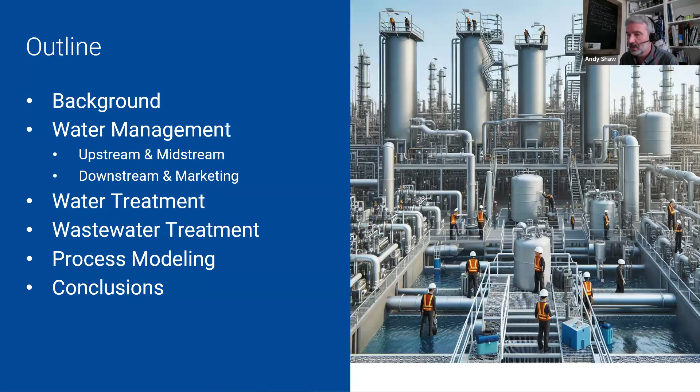Then he'll pass it back to me. I'll talk about process modeling. That's one of my strengths that I've been involved with. And in the book that we'll mention at the end, I was involved in pulling together the team that developed materials for that particular chapter. And then we'll wrap up with just some very brief conclusions, and then the shameless plug at the end for the book for those that want to go and get it. So without further ado, I'll move into some of the background information.

First of all, for those who are not familiar with crude petroleum, some of the things we need to think about are the main constituents that are naturally in petroleum as it's been mined and refined. Of course, there are the hydrocarbons themselves. That's what we're after when we get our crude petroleum, from the paraffins, naphthenes, the aromatics, as well as the aliphatics, and then various other hydrocarbons that are involved in the mix.

In addition, along with the hydrocarbons that we do want, we get a bunch of other things that we don't particularly want, such as some organic sulfur compounds. So as we're pulling that out, we've got to deal with that, and obviously some of that will move into the liquid phase. We also have organic nitrogenous compounds that we need to deal with, some oxygenates. We're also pulling up sediment and water along with the oil, so we've got to deal with that as we're producing the water.

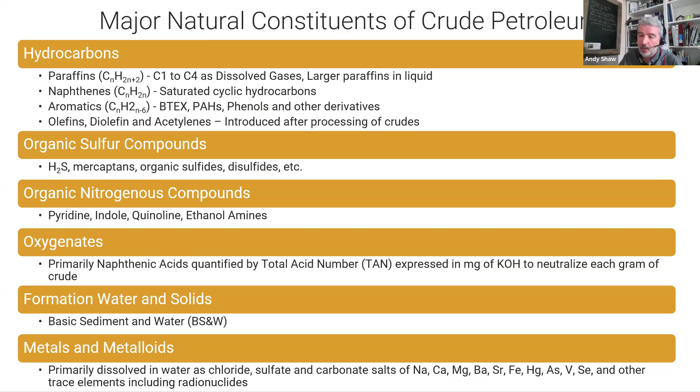We produce water as well, and as the petroleum's coming out of the ground, there's a whole bunch of dissolved ionic species, metals and metalloids that are in the water and in the oil. So we've got to keep those in mind as we're thinking about water management, what's produced as we produce petroleum.

In addition to what comes naturally, we within the industry are adding various chemicals. We're adding chemicals for antifreeze to stop things from freezing up. We will be adding some chlorinated organics there, so we need to be cognizant of those. And then there will be some amines added to suppress H2S production during transport and in the rail car. So there are additional things added to the petroleum that we've got to deal with once we get to the refinery in particular.

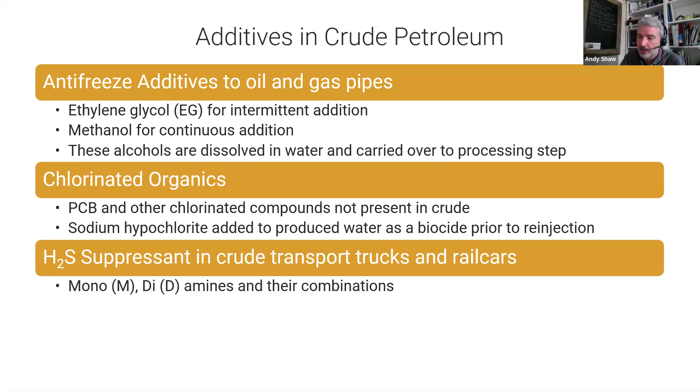Next thing I just want to touch on was how do we think about the petroleum industry? This is good to understand. There are basically three sectors that we've labeled within the petroleum industry. There's the upstream, which is the exploration and production. That's the drilling and production of the oil. Midstream is collecting and moving that down to the downstream, and downstream basically is the refineries. And sometimes we also include in downstream the marketing of collecting the produced products and shipping them out to various folks.

So at each one of these stages in the business sectors, they have different impacts on the water cycle. And that's what we're going to move through in the next few slides. I'm going to pass it on to Sam to start with the upstream and then move on through the process and look at the water impacts.

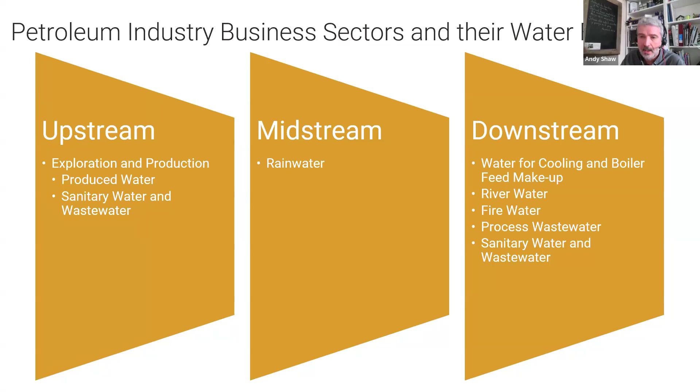So with that, Sam, if you want to unmute yourself, I'll pass it on to you. And you just nod when you want me to go to the next slide. I think you're muted right now, so we've got to unmute you. Okay, can you hear me now? I can hear you now. Okay, great. Over to you. Thank you, sir. So thanks, Andy. Let's move on to the next slide.

Okay, so this is a representation of the sectors that Andy just talked about. It starts with the upstream, exploration and production. Midstream is storage and transportation, and downstream is processing, refining pretty much. And then finally, marketing through terminals by rail cars or barges, etc. Next slide, Andy.

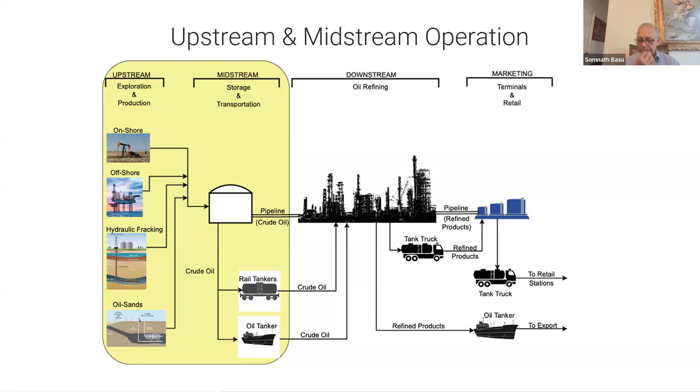So we are going to start with the upstream part of it. And what are the resources? This slide shows a very elementary description about the resources. You can see the conventional resources are up on the top surface, very close to the ground. And then the unconventional resources are the shale oil and gas resources, which are farther deep down, and they are all stored in very, very fine porous rock structure. So this gives you a background of what kinds of petroleum resources are there, conventional versus unconventional. Next slide, please.

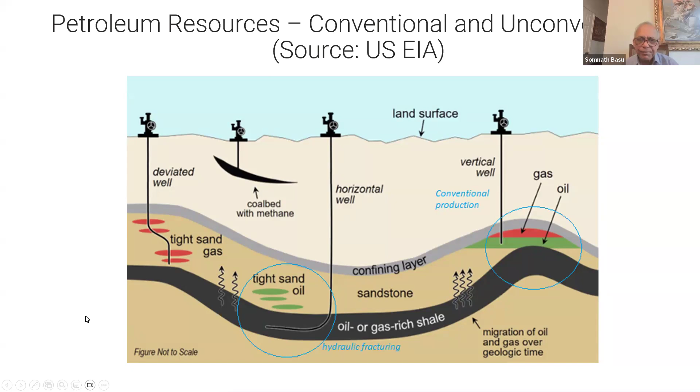Okay, I'll go through this very quickly. Essentially, for conventional production, the petroleum crude comes out from the ground through the wells, and then it goes to separators, and this is a three-phase separator where you can separate oil, gas, and water. And water, you can see from the bottom, goes to the processing stage, and then finally it is disposed. And currently the major disposal means is injection into the ground.

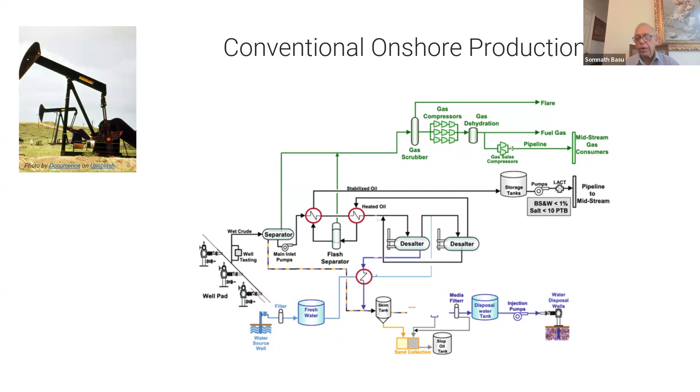Other than that, you can see the oil that is processed goes to the desalter, and I'll describe the function of the desalters. Also, please note that desalters are not very common in the upstream industry. There are some sites which use desalters, but primarily it goes straight into tankage and from there is transported to the sales and marketing segment. And then the gas goes to gas processing, gas dehydration, and then to the pipeline. Next slide, please.

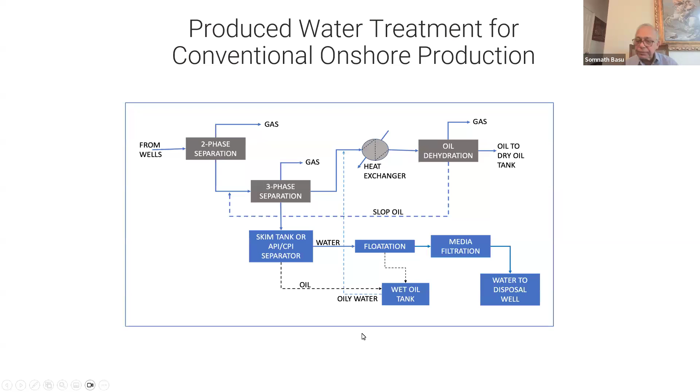Okay, the conventional offshore production is very similar to conventional onshore production, except for the fact that the footprint is very limited here. There is very limited space because these are all located on the platforms, and these are platforms in the deep sea or ocean, so they are footprint challenged. That's why you can see in many cases they use cyclones or hydrocyclones as opposed to API separators, which use a lot of space because it's basically gravity separation.

And then the compact flotation unit: instead of DAF or DGF, typically IAF is used, and I'll explain what the difference is. But induced air flotation units are used, which consume less space. And again, the water is sent out for disposal, and in this case the disposal is overboard, so they are disposed into the ocean or into the wells underneath the ocean. In most cases, it is disposed into the ocean. So there are many regulations that regulate the quality of the effluent. I'll come to that later on.

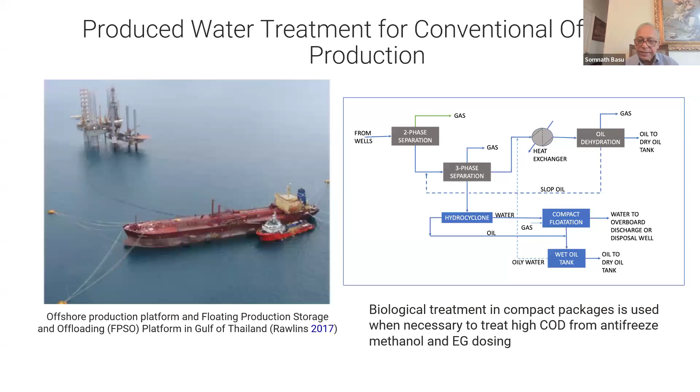And then let's go to the slide, Andy.

Okay, now the second part of upstream production is unconventional production. That's by hydraulic fracturing, and you must have heard quite a bit about hydraulic fracturing. And just to give you a perspective, in the US, about 85% of the production is by unconventional production. And a major part of that, I would say maybe 90% of that, is by hydraulic fracturing. And there are three major shales or formations in the US that contribute to this abundance of oil and gas in the US.

I can remember back in the 1990s or early 2000s when the US was building some ship channels for receiving crudes from the Middle East and other countries. Now, with the advent of the upstream production methods, particularly hydrofracturing, where the water is sent at a very high pressure and very high velocity, it can break up the rock structure, the shale structure. In this case, the oil and gas is trapped in the very, very fine micropores of this rock structure, so it's very difficult to tap out oil from there. This was invented by a gentleman by the name of George Mitchell of Dallas, Texas. And hydrofracturing releases the oil and gas, and you can see the simplified version.

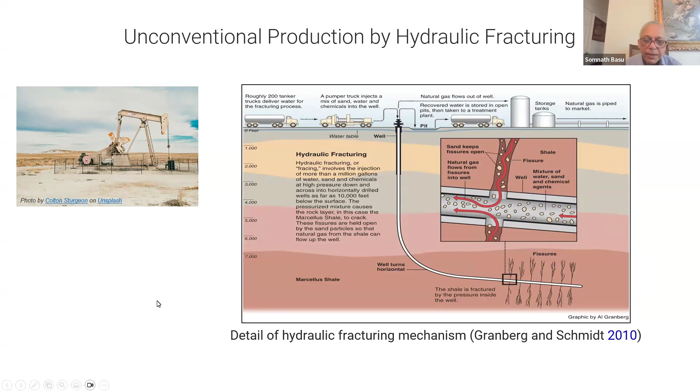Next slide, please. Andy, can you please move the slide? Can you please move the slide, Andy? Is it moving? I moved it on my end. It might be laggy on your end. Okay, I do not see it. Are you seeing the shale gas situation, Dan, or are you still? Yes, shale gas plays, lower 48 states. I think you're laggy on your end. Okay, then I'll go to my slides.

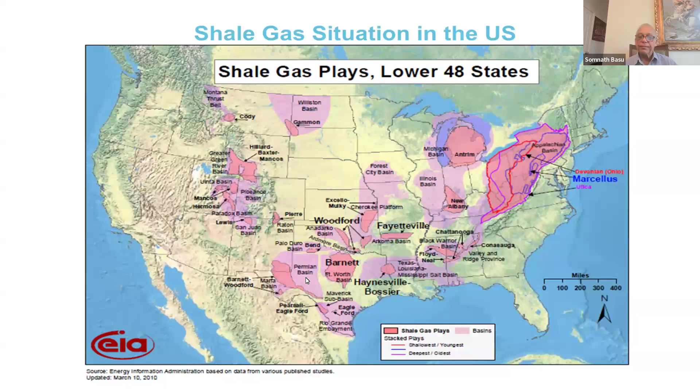So we're just showing the different shale gas areas which you've already got. Again, this goes back some 10, 12 years. I'm sure this has been updated by EIA, but this is what I had. And so you can see the Marcellus Shale in the northeast corridor, and then Bakken is up in the North Dakota, Wyoming area, and then there is the Permian Basin in Texas, West Texas, and New Mexico. Okay, yeah, I can see it. Okay, then the next one.

Okay, so when I said that water is pushed at a very high velocity, it's not just water. You can see this is the composition of frac water. Frac is the short term for hydrofracturing, and people in the industry very fondly call it frac. So you can see at the bottom of this table, water is 99.5%, and there are various other constituents, but each has its own function. And you can see the role of each of them. And one of the most important things is guar gum.

And basically guar gum is used, which is a gel, and this is used to suspend the proppants. Proppants are sandy particles, very fine sand or silica particles, which are suspended into the water, and that goes and hits these rocks to break them apart. So you can see each of them has a purpose. So I'm not going to go into the details, and we can discuss this at the end.

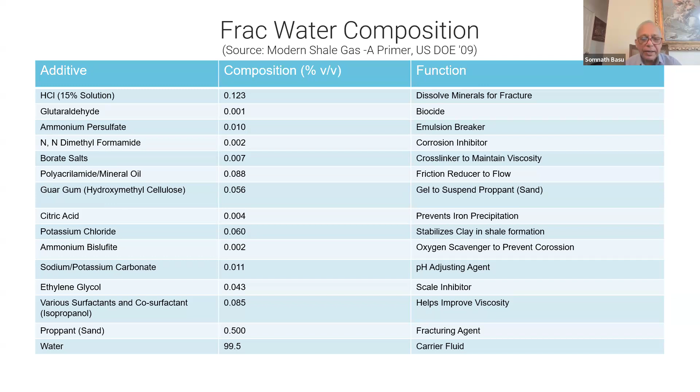And you can see what is the water footprint in upstream operation. Frac water, then flowback water, where flowback is some of the frac water and some of the produced water. What's the difference? Now, flowback is when most of the frac water returns along with some produced water. Produced water is the kind of water that is also called connate water, C-O-N-N-A-T-E, connate water. And that is the kind of water that is native to the rock structure. So it comes out with the crude. So it is not something that is injected from above ground.

And you can see I have the list of the constituents or characteristics of produced water, and the TDS is extremely high. Okay, you can see high concentration of sodium, high concentration of chlorides. So it is very, very saline. But along with that, there are some very important constituents that one has to consider while coming up with some technology for treating the upstream produced water. And those are the divalent cations. Particularly, it is very critical at Marcellus.

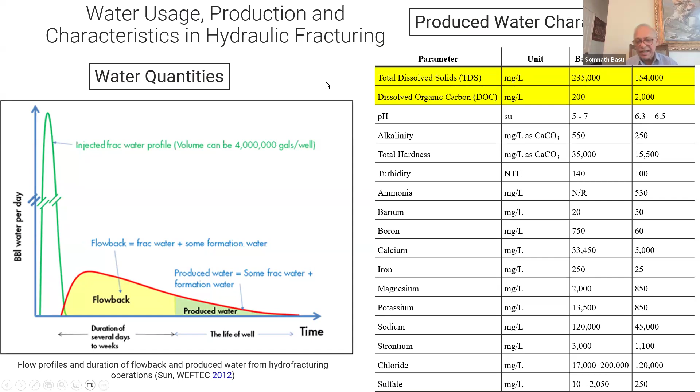If there is a lot of calcium and magnesium hardness present, then you have to treat it by lime soda process, followed by a treatment by sodium sulfate, and sodium sulfate reacts with divalent cations barium and strontium to precipitate them to form solids of barium sulfate and calcium and strontium sulfate, so they can all settle in the gravity clarification step, after which the water is ready to go to biotreatment. But I can also tell you biotreatment is very uncommon in upstream produced water.

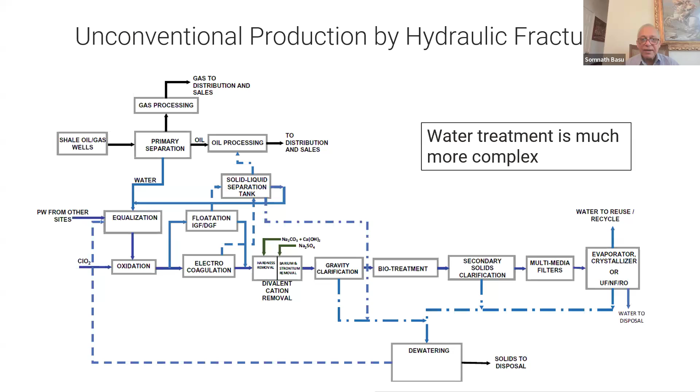In many cases, it's not needed, but I'll explain to you later that regulators are asking the operators to move away from the underground disposal. What is the option? The only option is you recycle and reuse it. And for that, the steps to be taken are evaporation, crystallization, or UF and RO. And we'll explain that later on. Next slide, please, Andy. Okay.

So to summarize, two main classes of upstream production, unconventional and conventional. Now, I described in detail the conventional, onshore and offshore, and unconventional hydrofracturing or fracking. Now, what I did not describe is thermal EOR, thermal enhanced oil recovery. And this is mainly applicable to the oil, the rocks that are mined in the Canadian Rockies, and they are semi-solid, very hard, and they don't move, very high viscosity.

So you have to do thermal treatment by steam, or in certain cases in situ combustion in the formation sites to make them liquid enough so they can be transported by piping or by other means of transportation. Now, here also the water treatment is challenging because you have to have a boiler unit on site to produce steam. And in order to have the water of the right quality for feeding into a boiler, you have to have the water treatment system that can produce the boiler quality feed water, which produces steam that is used in thermal EOR. Next slide, please, Andy.

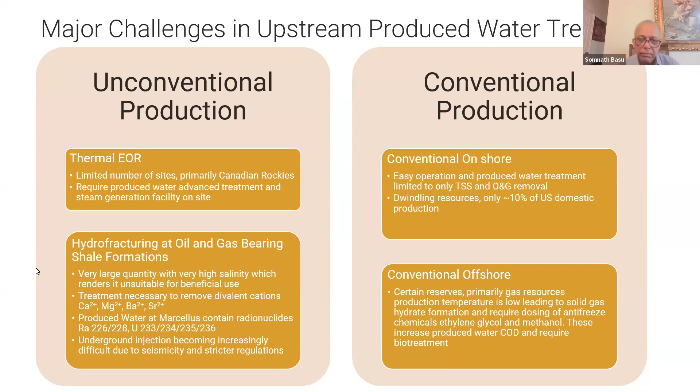Okay, the next one is downstream and marketing. I skipped the midstream because that has to do with transportation, and there is not much water or wastewater treatment there. So next slide, please.

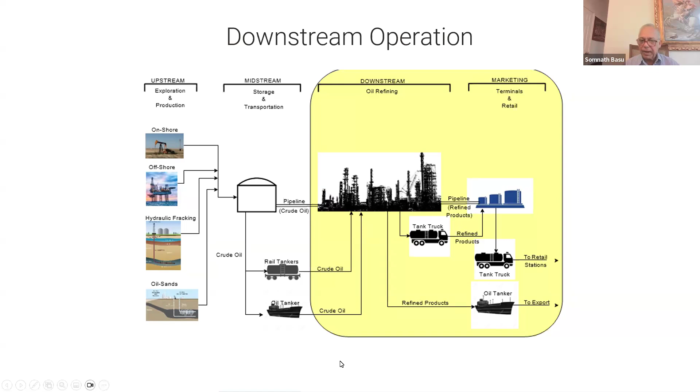Okay, so downstream operation mainly is petroleum refineries, where the crude is processed to produce valuable products, which we use day to day: gasoline, naphtha, diesel, and of course gas, which is the lightest fraction. And you can see the slide again, the downstream part of it, and then the products are sent out to the market by barges, oil tankers, pipelines, and tank trucks. Next slide, please.

Okay, now in case of downstream, we have both water treatment and wastewater treatment, and on the right hand corner is the block flow diagram for water treatment. I'm not going to go through it. It seems a little bit complex, but let me explain what the main water streams are. Stormwater handling and disposal. Stormwater in most cases is clean water. It doesn't have to be treated.

So it is either entirely oil-free, but the stormwater that falls into the process units like distillation columns or the places which have sheens of oil, they are called accidentally oil contaminated water. When it is entirely oil free, let's say from the office buildings and from the areas which are totally away from the actual refining unit operations and processes, mostly they are stored for later use as utility water or fire water or even makeup for boiler and cooling tower.

But if it is accidentally contaminated, it is sent to reservoirs and then it is tested for COD and other contaminants. And if it is hydrocarbon free, then it is combined with EOF water and then it is sent to the proper disposal and use. Then fire water storage and handling. This is very important, and most of the refineries have their own impoundments to store the stormwater, rainwater, and water from other sources like lakes or nearby rivers. Because in case of a fire or accident, fire water is very important to prevent and to mitigate the situation.

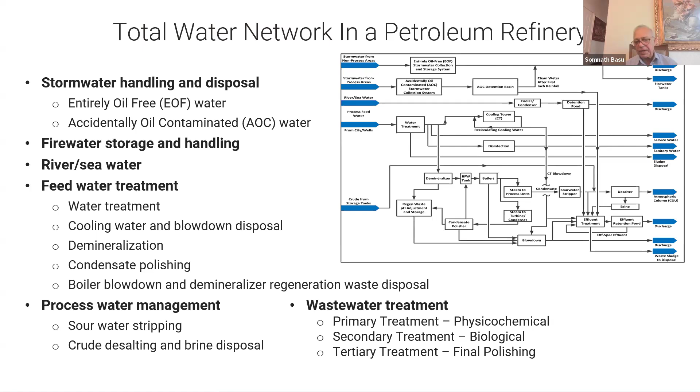And then finally, wastewater. This is the total water footprint: primary treatment, secondary treatment, and tertiary treatment, leading to final polishing. Next slide, please, Andy.

Okay, so you can see the water used in refineries, and I just mentioned the blowdown, which is to the wastewater treatment plant. So it is lost, and that is a huge consumption of water. And then the next is the boiler feed water. And then there are other consumers also in sanitary water.

And why do we need sanitary water? Because where will the employees go? They need sanitary water for drinking, cafeteria. Typically the sanitary water discharge is not sent to the process wastewater. It is typically handled by a packaged plant on site. And that's true also in case of offshore in upstream, where the personnel waste and the cafeteria waste are treated in separate package plants on the platform. Next slide, please.

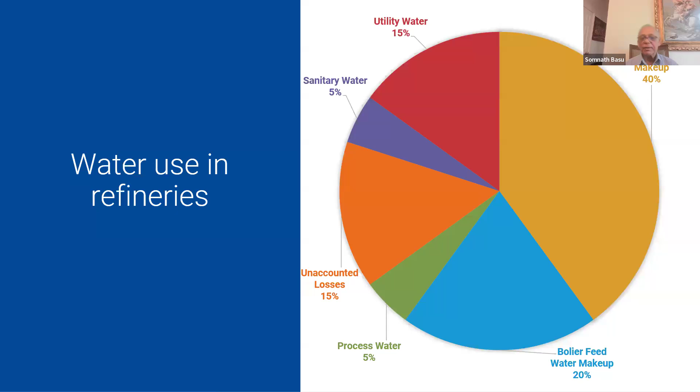Okay, now this is a very familiar slide. Now, when the water is pretty clean, it comes from a lake or surface water. It just goes through the traditional process train: coagulation, flocculation, and then settling sedimentation, and then it goes through a multimedia filter, and it feeds the advanced treatment steps.

What is advanced treatment? Now let's say the source of water is groundwater, which contains a lot of reduced iron and manganese in the water. Then, as you know, when iron and manganese from groundwater come in contact with atmosphere, they get oxidized, and they form particulate matter which settles in the downstream units, and you cannot use that. So that's why first they have to have some aeration step to remove those dissolved iron and manganese as particulate matter, and then you have to remove the hardness also.

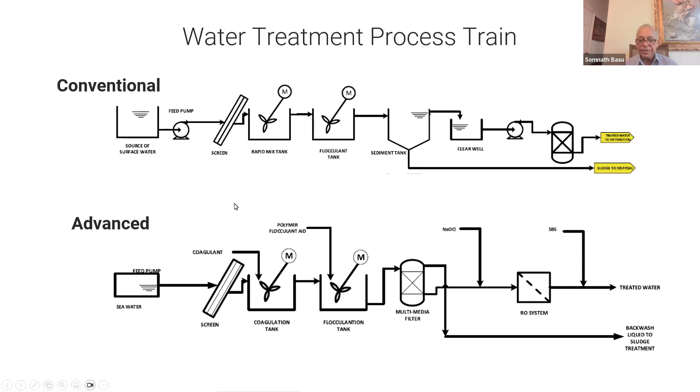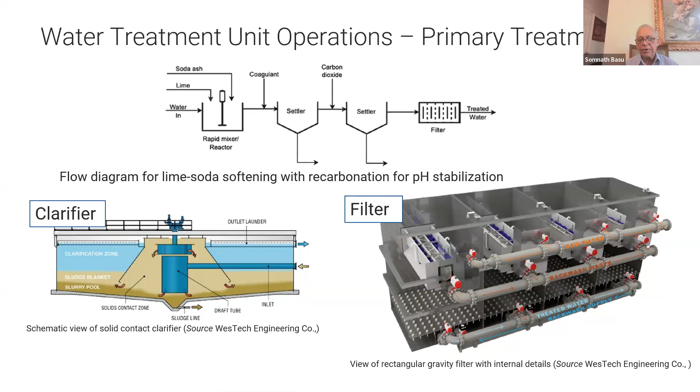Then the next slide, please. These are the pictures of some of the units that are used, and these are the same as domestic water treatment. So top there is the hardness removal. It's a traditional lime soda process, and then recarbonation by adding carbon dioxide. So that's the only thing I would add there.

Next slide, please, Andy. I guess it's not. Is it lagging a little bit? We've got water demineralization as the next topic. So, okay.

Water demineralization. And here the demineralization is done by ion exchange or RO, as I said. And ion exchange is very dominant and very traditional in case of refineries and thermal power plants. And it consists of a treatment train for cation removal and then decarbonation to remove CO2, then anion removal for chloride, sulfate, etc. And then final polishing mainly for silica removal and any residual anion and cation that are carried over from these two sets of exchangers, cation removal or anion removal.

And the regeneration is done periodically by sulfuric acid for cation removal and caustic for anion removal stages. And they are all released to the wastewater treatment plant after pH neutralization. And then RO process, one or the other or a combination of both are used. So RO is preceded by UF to remove suspended solids and then RO to remove the TDS, the dissolved solids and salts. Next slide, please.

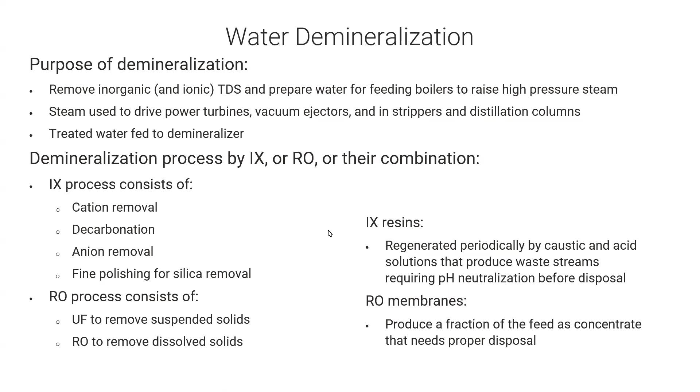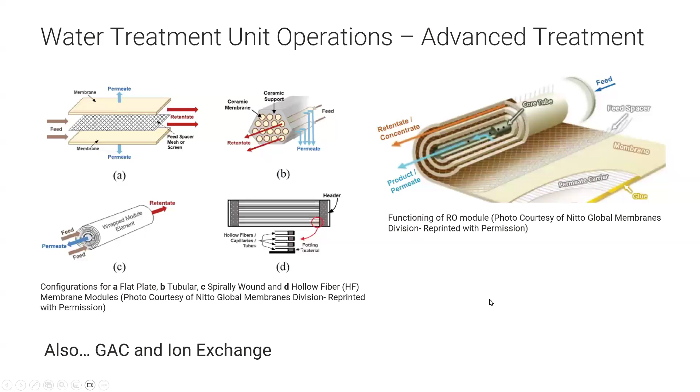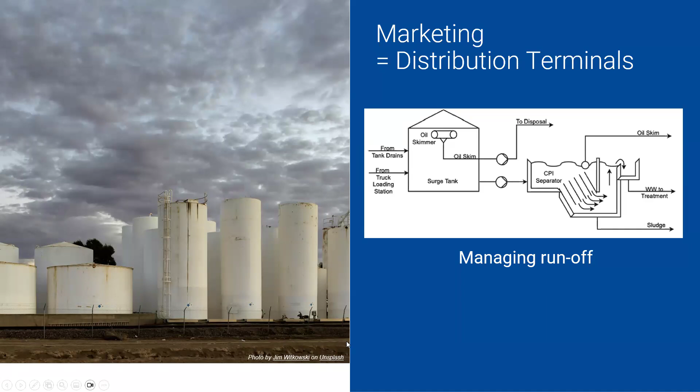Next slide, please, Andy. Marketing. Okay. So, Andy, I don't see the wastewater slides here. Okay, next one. Yeah, I see the wastewater slides. Okay. Okay.

So this is the crux of the secondary treatment. So basically, refinery wastewater has two levels of treatment: primary treatment and secondary treatment. I must say this: primary treatment is very, very important in case of refinery wastewater because there is a lot of contamination by oil, by hydrocarbons. And if there is passage of hydrocarbons into the biological treatment, then the whole treatment process fails. And there are many such examples.

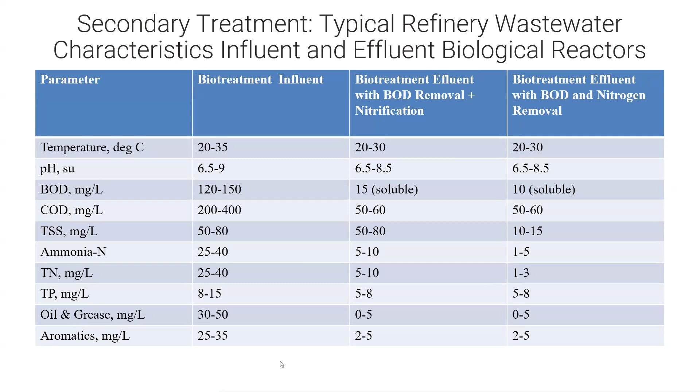Okay, here it is. Okay,

So in the downstream, there are two places, two unit processes or unit operations that use process water and that produce waste that go to the refinery wastewater treatment plants. Now, one is sour water treatment. What is sour water? Sour water is something that contains large concentrations of H2S and ammonia. Where does it come from?

In refinery operations, in various distillation columns and reactors, there is the sulfur compounds, the organic sulfur compounds and H2S come out with the products. Now, these products, let's say you use gasoline or diesel or even fuel oil that has high concentrations of sulfur compounds. When you burn it in a power plant or in an internal combustion engine, all those emit as SOx. And because of the tight regulations controlling SOx air emissions, the refiners are having to remove sulfur in the crude that comes with the processing steps.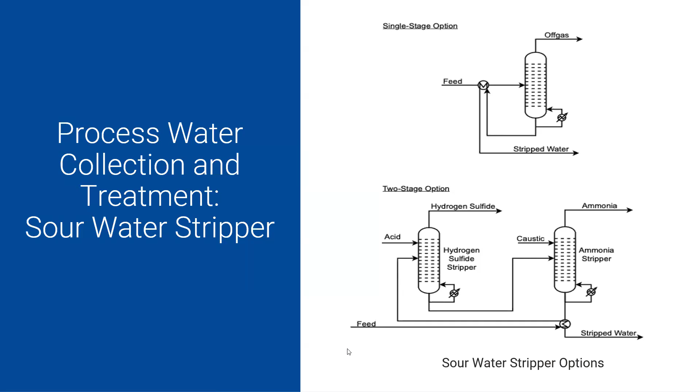Okay, the other unit where process water is used is a desalter. In the desalter, the crude as it comes from the ground, before it goes to any processing unit in a refinery, first goes through the desalter. Because as I stated before, crude contains a lot of salts, and you cannot allow that salt to go through the refining and downstream processing. You have to remove the salt, and that salt removal is done by desalters. And here, water is injected at a high pressure to mix up with the crude, and the separation has two functions. One is desalting, and the other is separating oil from water, because the aqueous phase, the water that you inject, dissolves all the salts.

So it separates the crude into an oil layer at the top and water layer at the bottom. The water layer goes to the sour water stripper where it is used to remove H2S, or directly to the wastewater treatment plant, and the oil layer is fed to the crude refining units, the atmospheric distillation column. So that's the fate of the two layers. And so you can see it's very important to have this desalting. And why is it important?

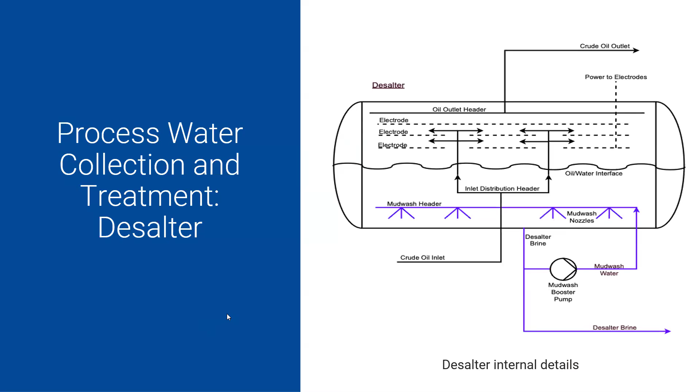Okay, so this is the schematic of the desalter units. It can be single stage or two stage. With single stage desalting, you can remove up to 95% of salt, and with double stage, you can remove up to 99% of the salts. Next slide, please.

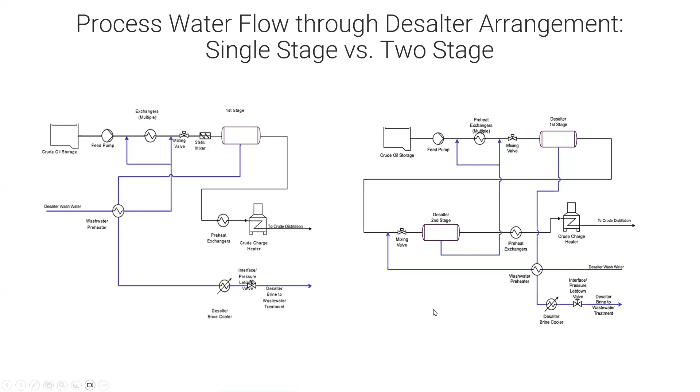Okay, so what's wastewater treatment? The wastewater treatment has two main steps: primary treatment and biological or secondary treatment. Now, again, as I mentioned, the function of primary treatment is to remove oil from water. And it is done in two steps: primary oil water separator, which is API separator. Mainly it works on the principle of gravity separation, like a clarifier. The only difference with a clarifier is it handles a lot more oil.

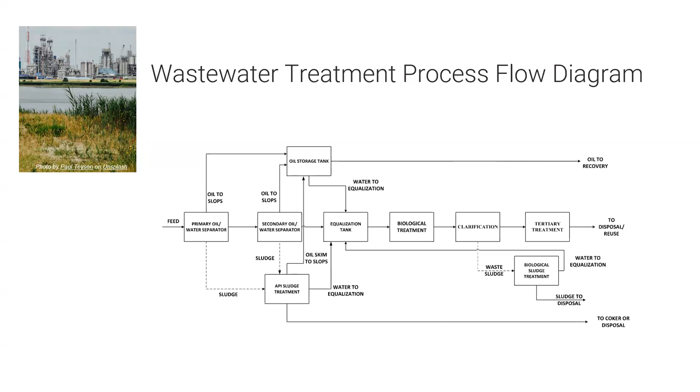And typically you can see oil is present in wastewater in three phases, which is the free phase oil. A large part of the free phase oil is removed in the primary separator, API separator. Then dispersed phase, which is the emulsion, which you cannot remove by gravity settling. And there you have to use the DAF or IAF, induced air flotation. And then after equalization, it goes to biological treatment, and then it goes to tertiary treatment and disposal.

Next slide, please. Okay, this is a picture of the API separator. It is very similar, as I mentioned, to a clarifier, handles a lot more oil. And so these are the parts, and you can see it removes bulk of free phase oil droplets more than 150 micron in size. And the influent oil and grease concentration can be anywhere between 200 and 80,000 ppm. But the effluent has to be limited to below 200 because it is fed to the secondary oil separator. Next slide, please.

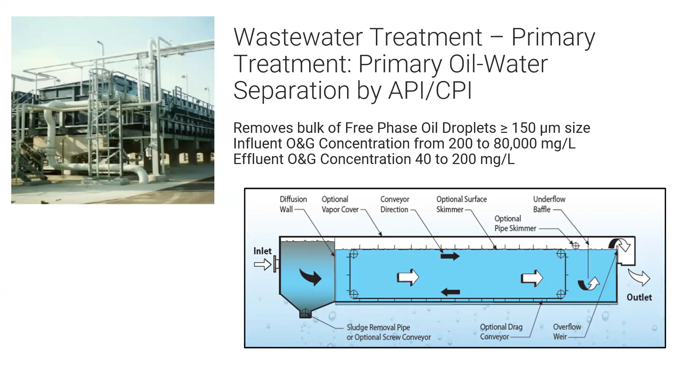The secondary oil separator of the primary treatment is by DAF or IAF. Now, what is the difference? The bottom left corner shows a graph of the bubble size and the distribution of the number of bubbles. And why is it important? Because DAF, or DGF, has to have between 10 and 100 micron size of bubbles to be effective. And in case of DAF, it is dissolved air.

So air is saturated with the DAF effluent, the treated effluent from DAF, and then it is released as it enters into the DAF unit. So it is released in fine bubbles, and those bubbles attach on their surface the fine emulsified mist of oil droplets. And the effluent has to be around 25 milligrams per liter. As you can see, IAF or IGF has higher bubble size.

And what is the difference? The difference is that in case of DAF, it is dissolved. In case of IAF, it is mechanical. Air is mechanically dispersed by some eductor or by mechanical mixers. That's why the bubble sizes are different, and so is the separation efficiency. But still, IAF and IGF are used particularly when the footprint is challenging.

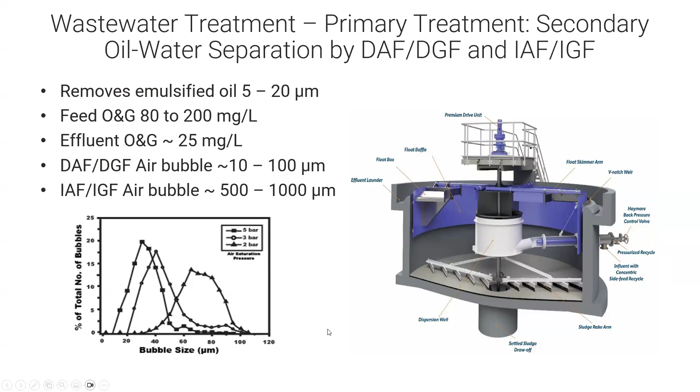Okay, biological treatment is the last unit process. Now, as you can see, lagoons, trickling filters, these are fixed film processes, and mostly lagoons are present in very old refineries, but they require large real estate, and many of the refineries, because of their space crunch, are coming out of lagoons and getting into more advanced type of treatment, typically activated sludge process. But lagoons and trickling filters and RBCs also are used by old refineries.

Trickling filters, one of the examples is the Deer Park refinery in Houston area, where they use trickling filter. It shaves off 30% of the COD upfront of the activated sludge process, and also it reduces the temperature because the wastewater temperature is upwards of 40 degrees C. It has to be brought down for effective activated sludge process. So it is brought down to below 35 degrees so it can be biologically treated. And then, of course, our old friend, conventional activated sludge, and that's the workhorse for refinery as well as domestic wastewater treatment. Next slide, please.

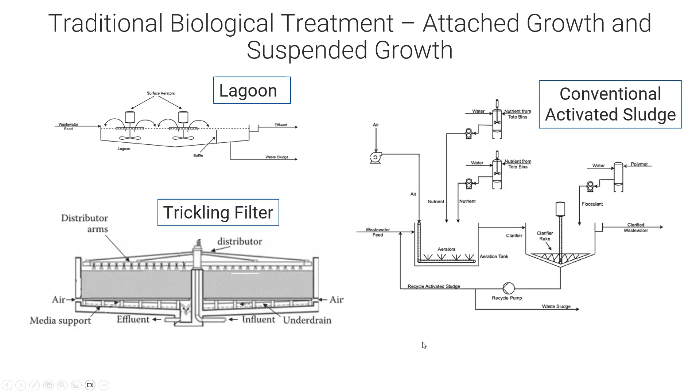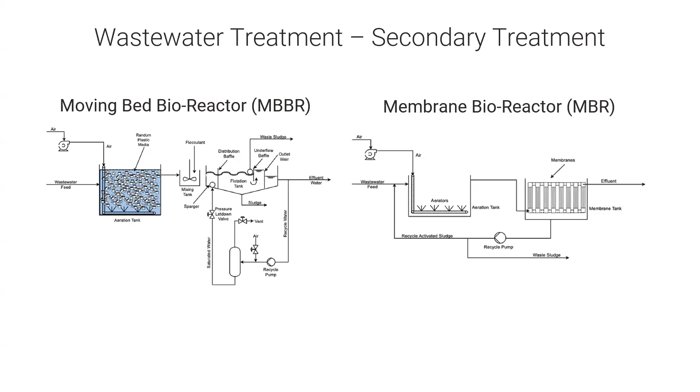Then many of the refineries, particularly grassroots refineries, are going more and more into newer processes like MBBR and MBR. I'll not go through the details, but with MBR, the main driver is to be able to reuse, because after MBR they use RO, and then they reuse it for recycle and reuse it for boiler feed and cooling tower.

Next slide, please. Okay, tertiary treatment. Now, why tertiary treatment? What are the drivers? The two main drivers are, as you know, refinery wastewater contains a lot of chemicals. So they may be driven by the regulatory requirements, or the other driver is reuse, as water supply is becoming more and more limited. And we have shown three typical processes.

Filtration is common with every refinery because once in a while the activated sludge process goes through filament problems, particularly nocardia problems. If there is a lot of slippage of oil from the primary treatment, it ends up in the activated sludge process. It creates nocardia, and refineries operate at very, very high SRT, 30 to 40 days of SRT. So it creates flocs that don't want to settle. So most of the refineries have filtration systems to arrest any passage of solids so that they can comply with the regulations.

GAC, the main purpose is to remove organics that may be toxic and that may not be in compliance with the regulatory requirements. And then, of course, advanced treatments to remove any metals that may get carried over, because metals are not arrested by any of the treatment processes upstream.

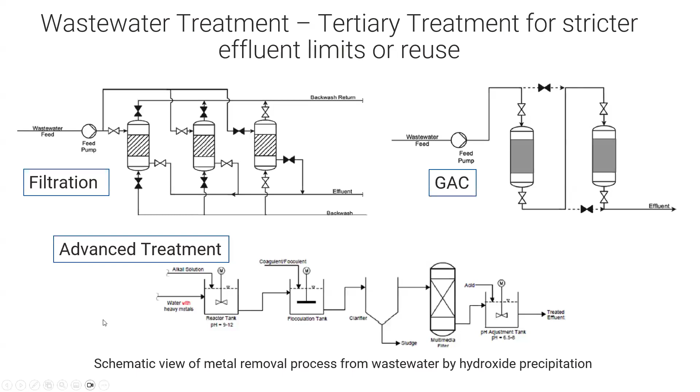Next slide, please. Okay, Andy, please take over. Okay, thanks, Sam. So you can see there's a lot of detail and a lot of different processes within petroleum processing. So we have a lot of different types of water streams, different levels of contaminants. So I just wanted to spend a little bit of time touching on some of the tools that are available to understand some of the different transformations and treatment options.

Process modeling: one of the very useful applications for process modeling is understanding the scaling potential that we have. As Sam was talking through, particularly the unconventional treatment, looking at fracking water, it has a high propensity for causing scaling. And if you try to do a hand calculation or a spreadsheet-based calculation to understand what level of scaling you are going to get, you don't get very good results. It's a very inaccurate, imprecise way of trying to understand what's going on in the system, because of the complex speciation of all the different metals and metalloids present in the water.

So therefore, going into a model-based approach to understanding the water chemistry and the potential for scaling is a much better approach. So that's one of the applications of using a process model. I'm showing one here from OLI Systems. That's one of the providers of this kind of software. They've got a very nice tool to be able to look at scaling potential based on the complex water matrix that you may have.

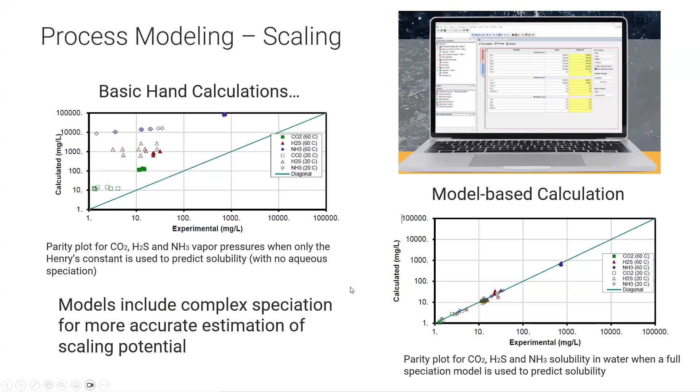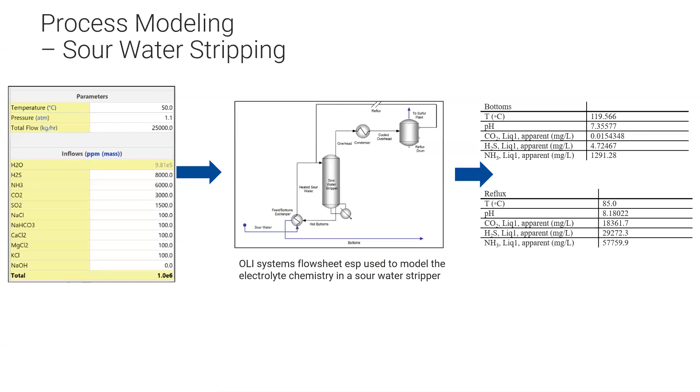Another application of process modeling, a little bit more straightforward, but again trying to understand the water chemistry, is looking at the sour water stripper that Sam was talking about earlier. It's understanding what is going to be the fate of my different constituents, particularly my H2S and my ammonia, which stream is it going to go in? And then how do I size and optimize my stripper column to get the right kinds of removals. So again, tools are available to do this using a process model, which is a much faster and more accurate way of doing it than a hand calculation.

Finally, I just want to touch on something that's near and dear to my heart, which is process modeling of biological treatment. If you look at this little diagram in the bottom right-hand corner, we've got processes there for biomass growth, decay, hydrolysis. Those are very familiar to anybody doing municipal domestic wastewater treatment. The IWA activated sludge models 1, 2, 3 were very much focused on those processes, the biological processes.

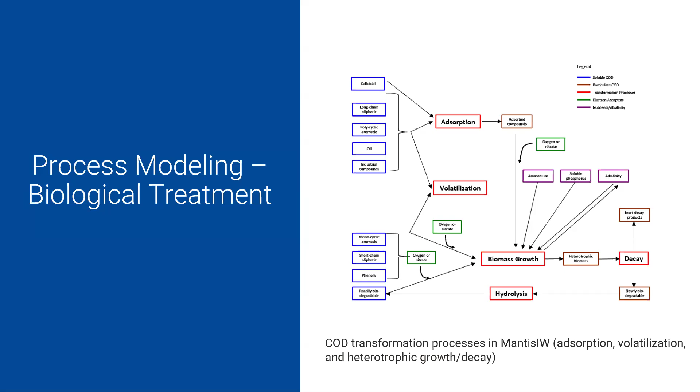As we move into industrial wastewater treatment, particularly in the petroleum industry, we also need to be thinking about volatile components, so the volatilization, and then we also need to be thinking about adsorption of the different types of components, different oil-based and colloidal type components. How will they get entrained and processed by the biology? So biological models as a whole are pretty complicated, and as we add on the industrial aspect, it gets even more complex. So having a simulator to be able to do that is a great boon. It's a real help to us.

I'm just showing one of the simulators that's available to do this, the Hydromantis one, the Mantis industrial water model. They've built this over the years. Very useful tool to look at your biological treatment. In this case, they were looking at the sizing of their bioreactor to get the right solids concentration and the right effluent quality, so you can use your biological model to do some optimization of your design there, or troubleshooting. You can also do that with the process models.

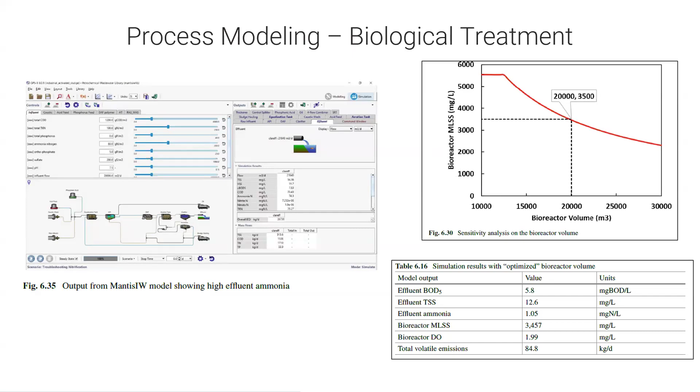So in wrapping up the discussion that we've had today, we know that water is vital for life. And as you hopefully got a flavor for through the details that Sam's gone through, water is a huge part of the petroleum industry. So different water uses, different wastewater products that we have to manage and handle, and we've got to manage it well, particularly as we're looking at the unconventional extraction of petroleum products. The produced water there is an order of magnitude more complicated, more difficult to manage. So we need to know what we're doing with those different water streams, and we have the technologies and the means to do the treatment and to manage it well.

Did you want to add any thoughts on this, Sam? Actually, very briefly on the regulations. That's a big part of the petroleum industry. And also, as I mentioned, WET testing. I didn't go into the details, but we can explain it later on offline because it is a subject by itself. But WET, that's very important.

That's a toxicity test. Now, also reuse is becoming more and more common in refineries, because you can see the makeup water, boiler feed, and cooling tower makeup water. Those waters don't come back, so they cannot be reused. They have to be disposed. So they add to the burden of the wastewater treatment plant and the cost. And as it is, water is in shorter and shorter supply. So the governments or the states are asking the refiners to reuse as much as possible.